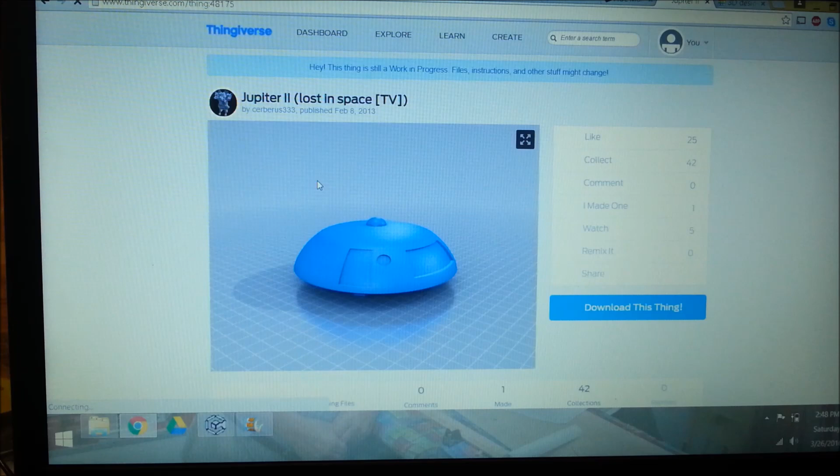And it appears he has this in two files. One is the whole spaceship and one with it split, so you can glue it together and you can have details on top and bottom. So I downloaded this object and I'm going to import it into Tinkercad.

And let's see, it's in my, here we go. It's in a directory and a subdirectory. And Jupiter 2 split. So there's the file. I'm going to select that, hit open. Now it doesn't just come onto your work surface. You have to go over here. I've got it in here. Choose file, Jupiter 2, etc., etc.

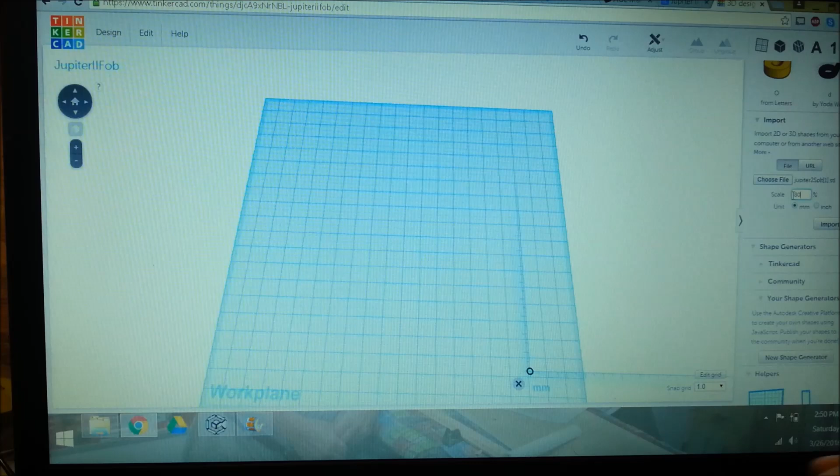Scale 100%. I think we'll make it a little smaller than that. Let's make it about 80% and import it. Little bar's working. Boom, there it is. I just happen to have a little bit of silver filament left.

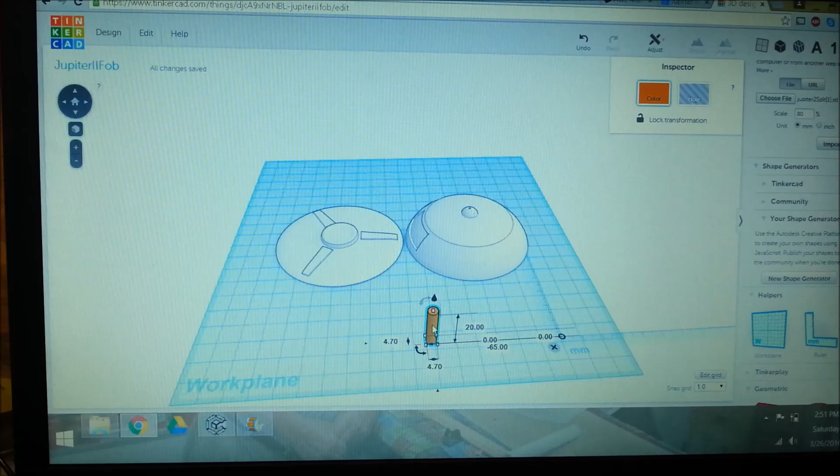Now to make this into a pull, I have to have a cylinder, and I've measured the diameter of the ball chain and the little coupler piece on the bottom. And the ball chain itself is an 1/8 inch. It's actually a little bit under, which is 3.17 millimeter. The coupler is about 4 millimeters. So I need a clearance hole.

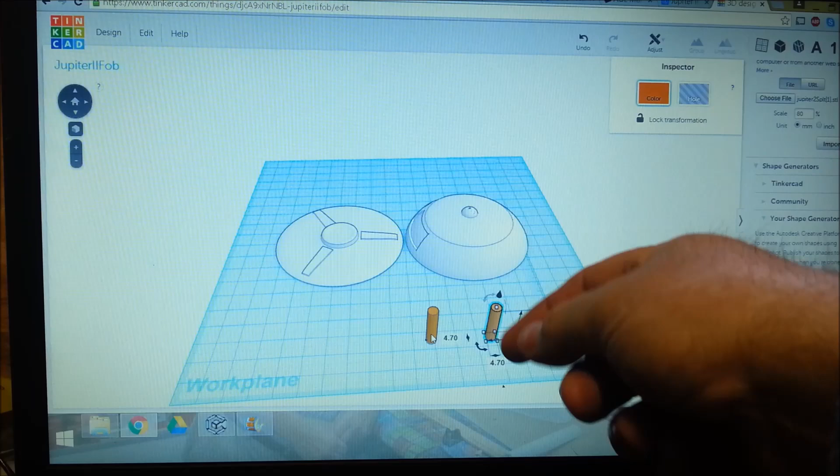I want to have the chain coming down through the center here and the coupler hidden up inside of this. So I need to clearance the coupler so it can slide up inside, but have this hole here in the top be only 1/8 of an inch, so it will stop the coupler, so the coupler won't get through. So I'm going to print this at 3.2 millimeter, which is about 1/8 of an inch.

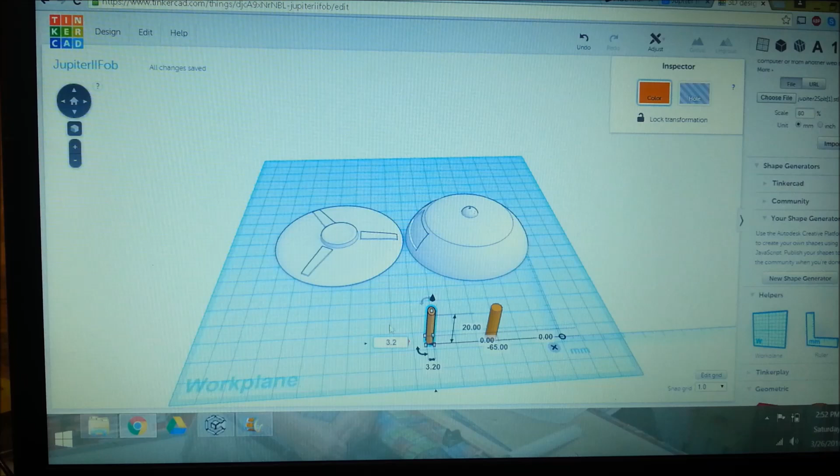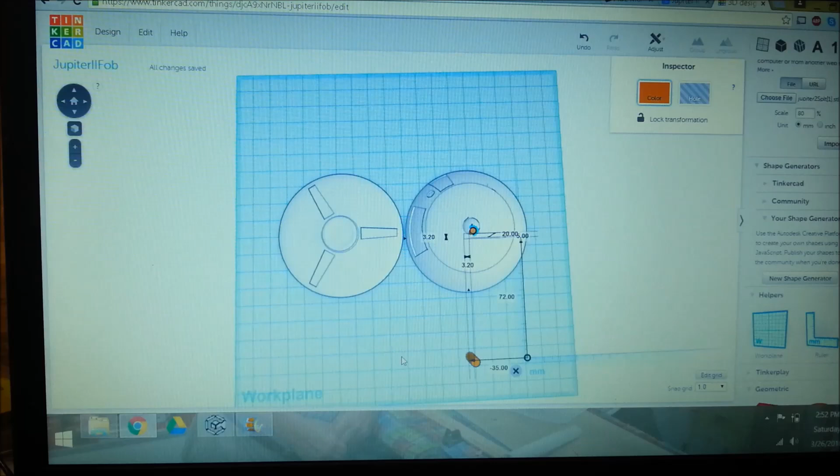And this needs to be my top hole. I'm going to drag it over here, and it doesn't quite come through there. Let me raise it up 5 millimeter. There we go. Now I need to center that. Now this is all one object that I can't ungroup. So if I were to use my centering tool, it would probably put it right here.

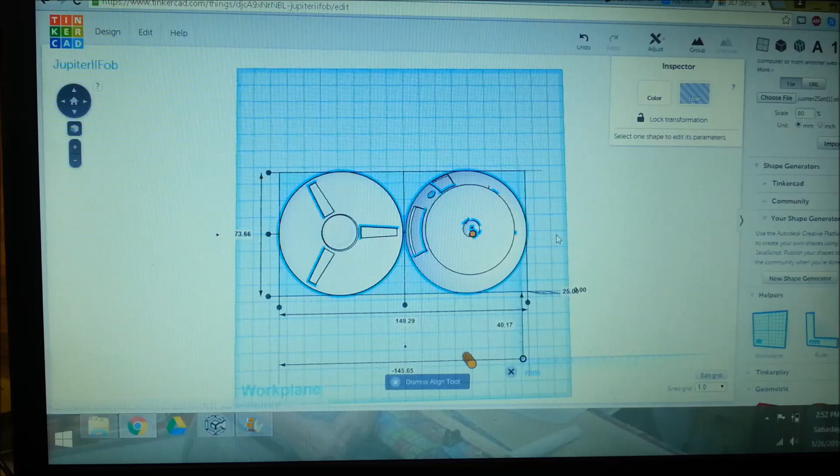But I can use the centering tool to get it in the center from top to bottom, and that'll help me do alignment. So let me grab this whole thing here and adjust, align, center. It should be in the middle. And it actually looks like it's in the middle left to right too. It's pretty close.

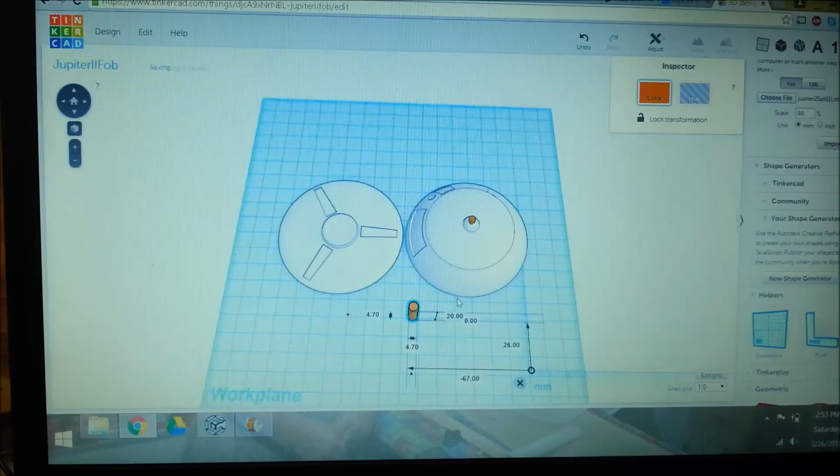Okay, this piece here needs to go underneath of it. And I think I'm going to shorten the height of it to, let's say, about 12 millimeters. That ought to be enough. Let's make it 13. That's about 1/2 inch. That'll be enough to hide the ball chain coupler up inside of it.

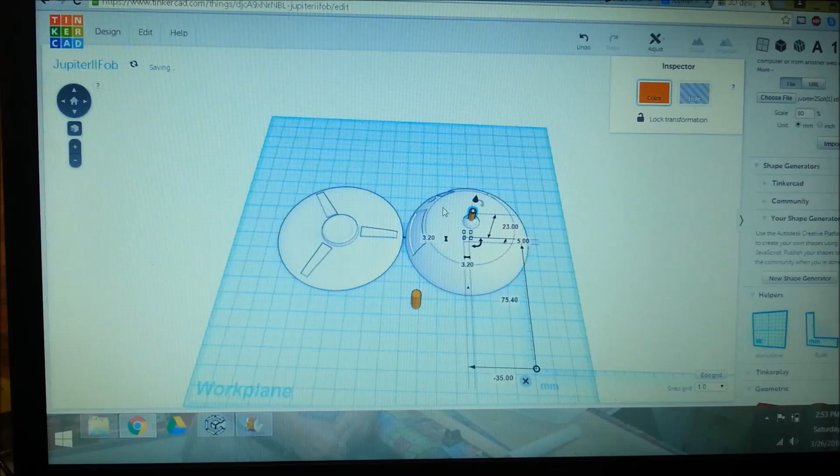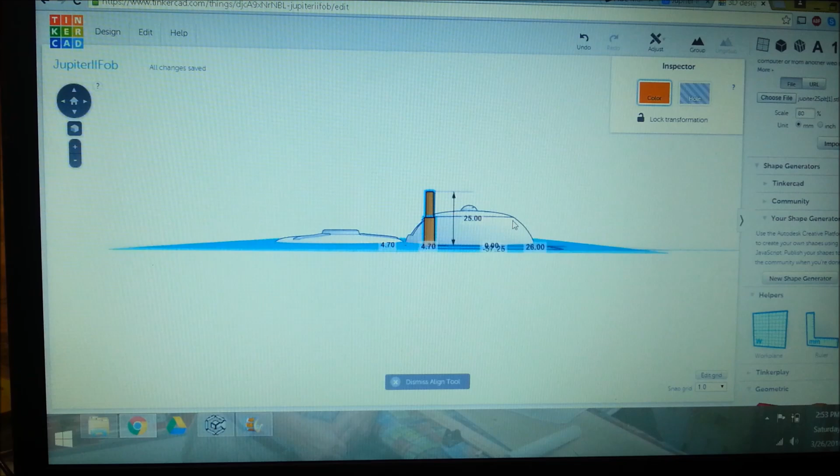And really, I did this wrong. I really want to center. Woo, what am I doing? Must have grabbed that little white block for stretching that. Really what I want to do is center these two objects and group them. Adjust, align, center. Okay, so there's what my hole is going to look like. Let me group it. Let me make it a hole.

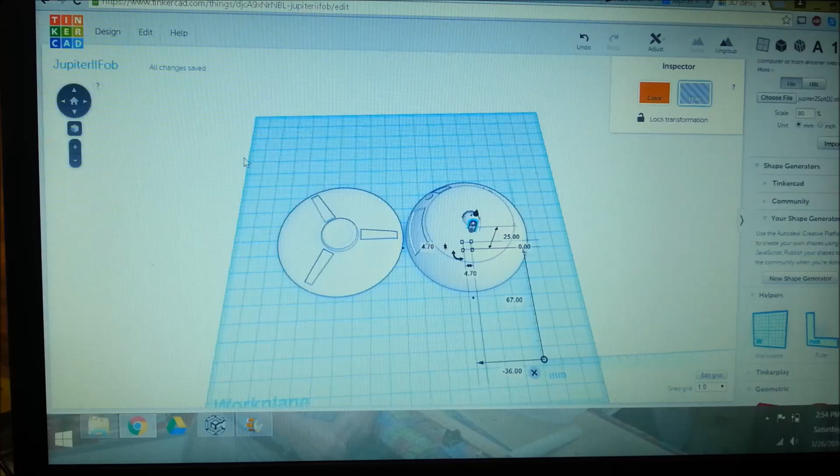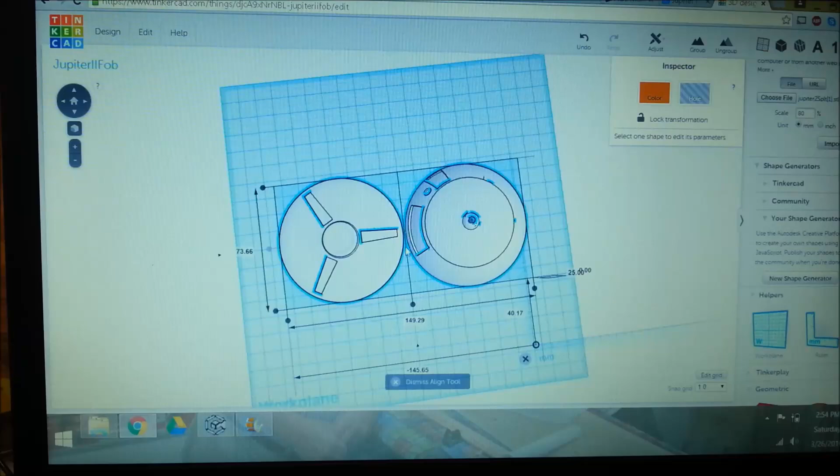And just to give you an idea of where the big hole ends, I'm just kind of sliding it in there. Okay, so now let me center it on the horizontal axis. Adjust, align, and I'm going to hit this. And I'm going to look at it this way. So I'm centered perfectly that way. But the question is, am I centered this way?

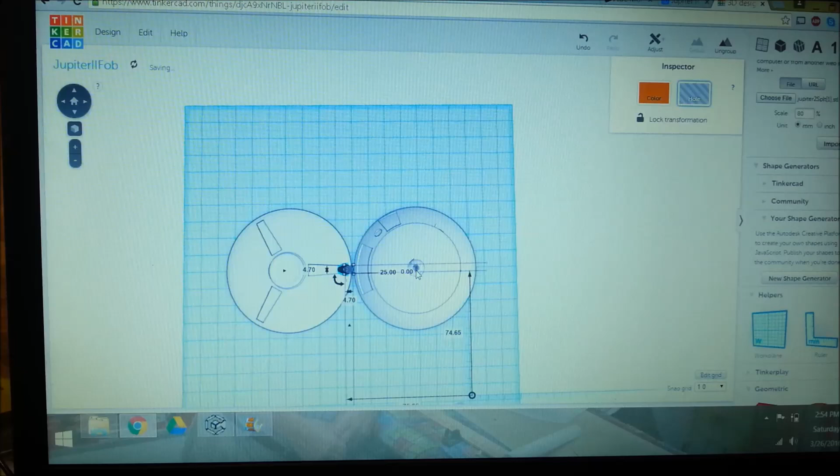Now, in order to get rid of any weird angles here, I'm going to move this into the center of the screen. Wow, it really looks like I've got that dead in the center there just by luck. I've done that twice in a row. So let's copy this. And now I'm going to use my left arrow and move it over and put it in the center of the base.

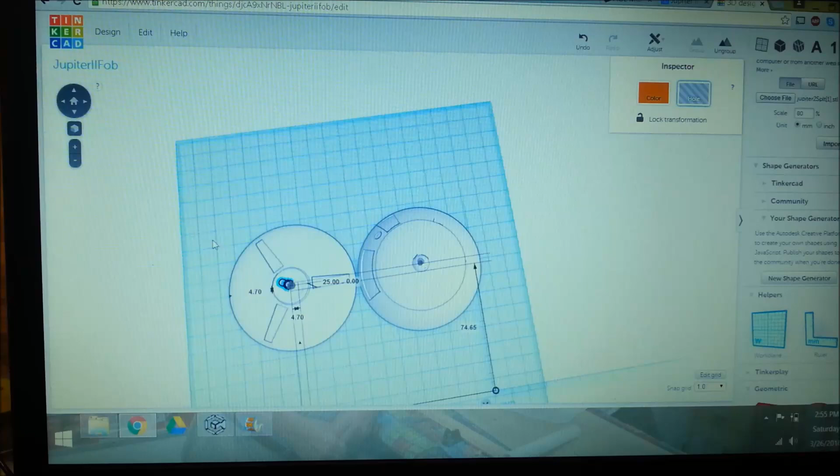And the big diameter is emerging up through here, just like we wanted. And I know it's centered this way because I just copied it and it sets it on the side and I slewed it across. So now we got to see if it's centered. We got to get it centered in this dimension now.

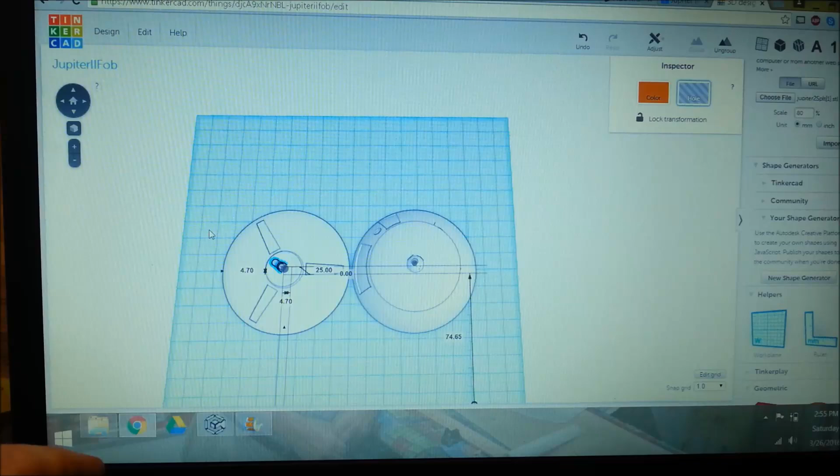Now notice I'm looking kind of down the side of this. It's got kind of a fisheye effect and my eyeball's right here. And so I'm seeing the side of that object, that whole object that I created. So I need to slew this whole thing over. So I'm going to hold the shift key down, right mouse button, and slide this over. And now you can see I can get directly above it.

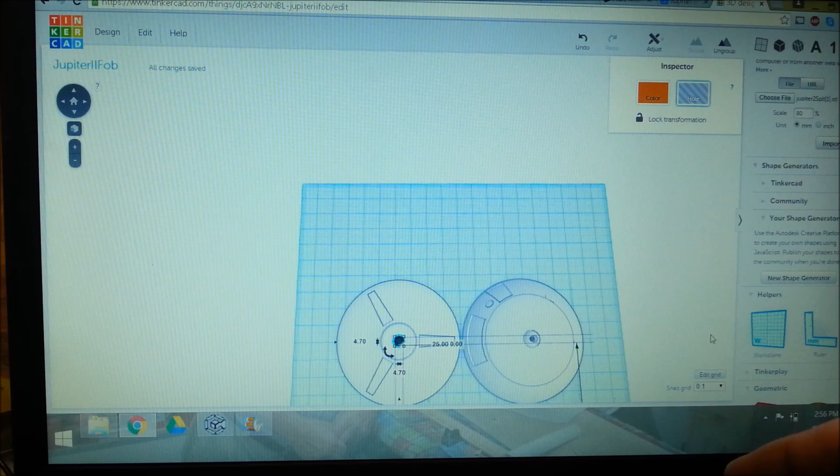And it looks like I need to go to the left a little bit more. Let's try 1/10 millimeter. Yeah, that felt like too much. Let's come back a little bit. Now that feels like about the center. Now if I'm a little bit misaligned between these two holes, it won't matter because I can run a drill bit up in here after I glue it together.

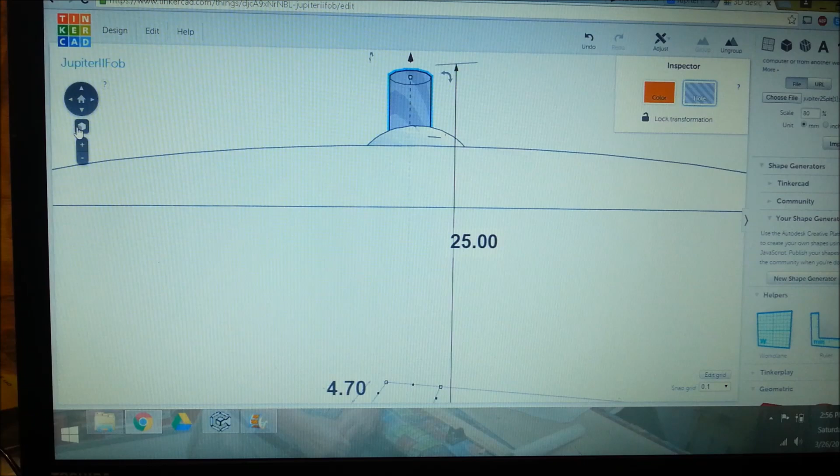Wow, now that I'm looking at this, it doesn't really look like it's in the center of the dome, does it? I'm going to select that item. We're going to zoom way in on it. Oh, look at that. Okay, so let's actually get it centered. And I'm looking at the distortion of the shadow it's showing me to kind of center that. Let me slide it around this way. That looks so much better.

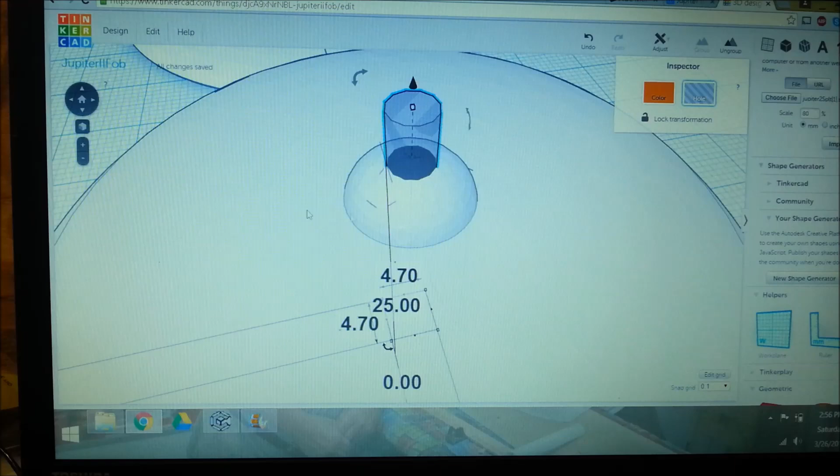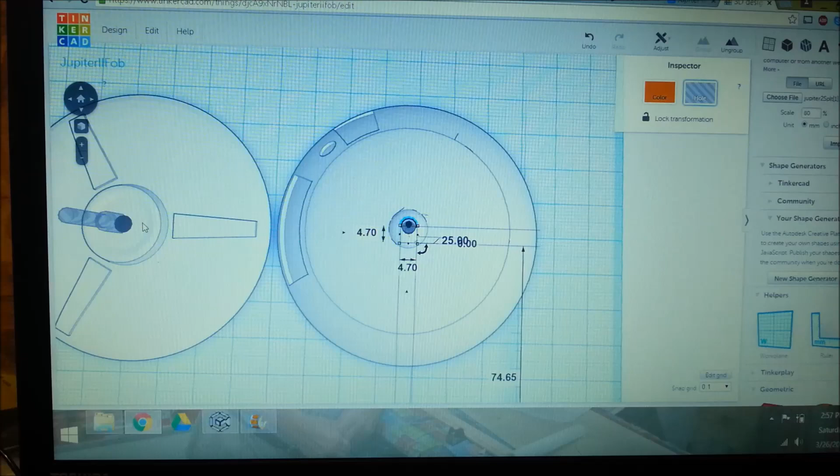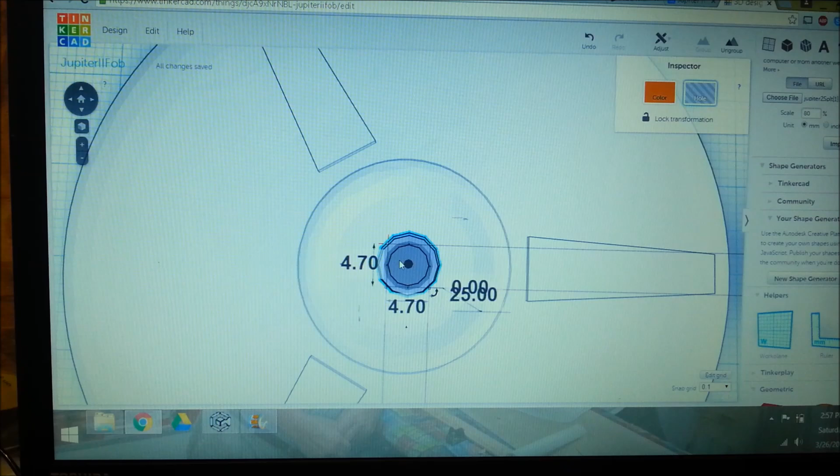This is the view that really counts. Yeah, I think I got it as close to the center in this direction as I can. I use the program to center it this way, so I don't want to mess with that. And let me pull this in and look at it again. Wow, I think I got that in the middle. Maybe it's a little closer that way. Let's select it. Yeah, I'd say it looks pretty good. I'm going to be happy with that.

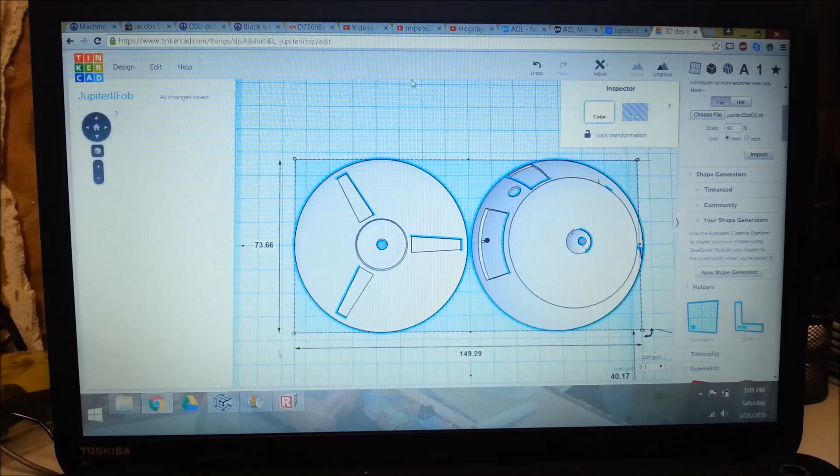Alright, before I import this into Repetier to print, I need to group this so that these objects will actually have a hole. There we go. Now I can download them for 3D printing.

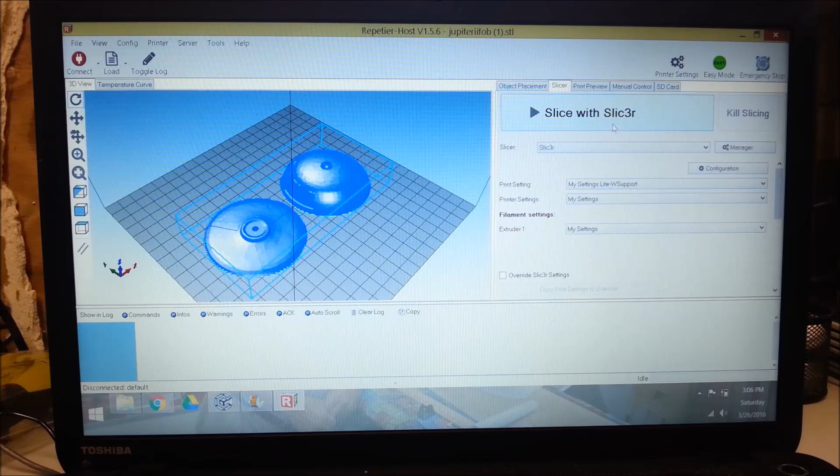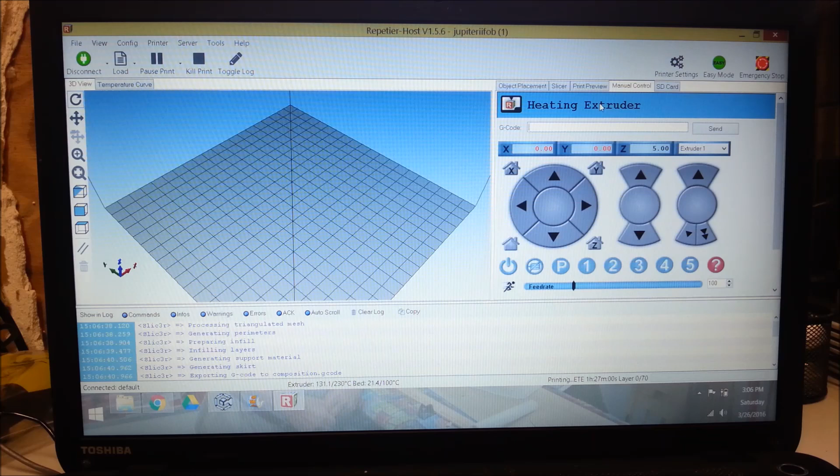I've got my light settings here where I'm not printing a solid object. It's just 2 shells and 25% fill. It says 11.3 meters of filament. I don't know if I have that much. Let's give it a go. Heating extruder. I will show you the results.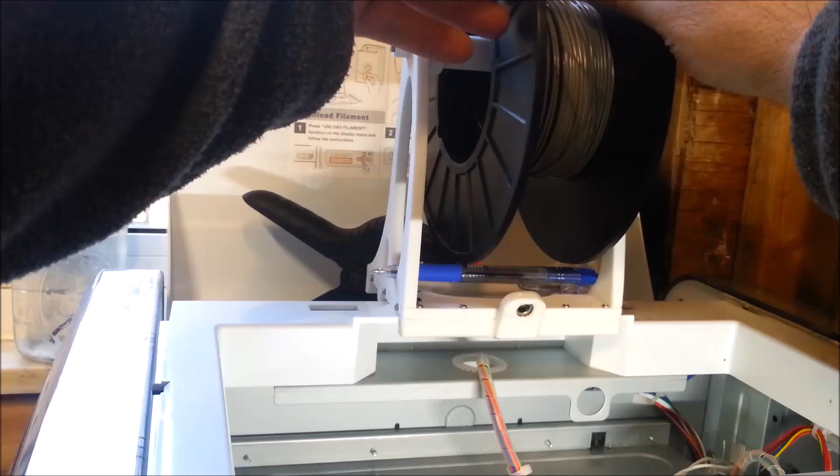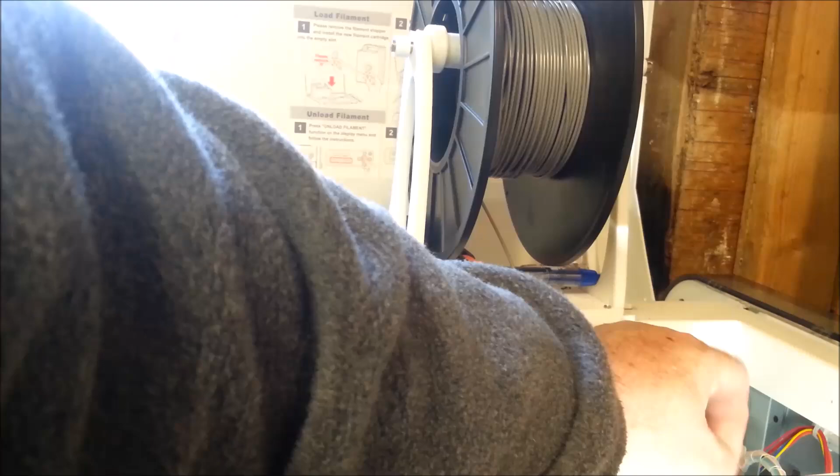Here's my prototype filament roller. I haven't done a video on this yet. Have some more modifications for it. We'll talk about it later. I guess this is gray, not silver properly.

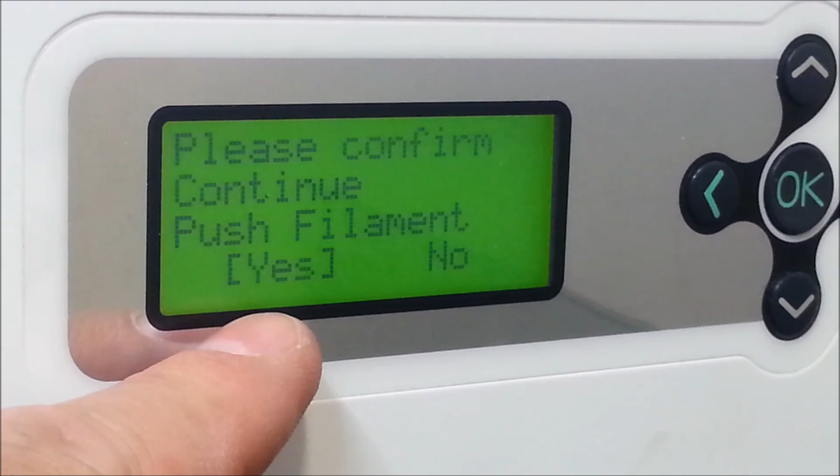There we go. This is the menu for loading and unloading filament, and I find I have to do 2 pushes, 2 segments of filament to push in to get a clean color change. So let it run through another, I don't know, a couple inches of plastic.

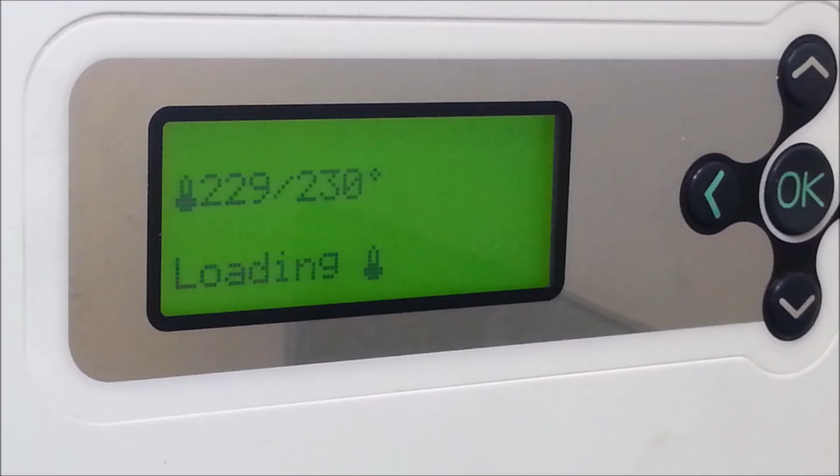Emergency. Got some junk hanging on there. Can't have that. I see one more little bit of debris that can fall into my print and mess it up. I think I got it.

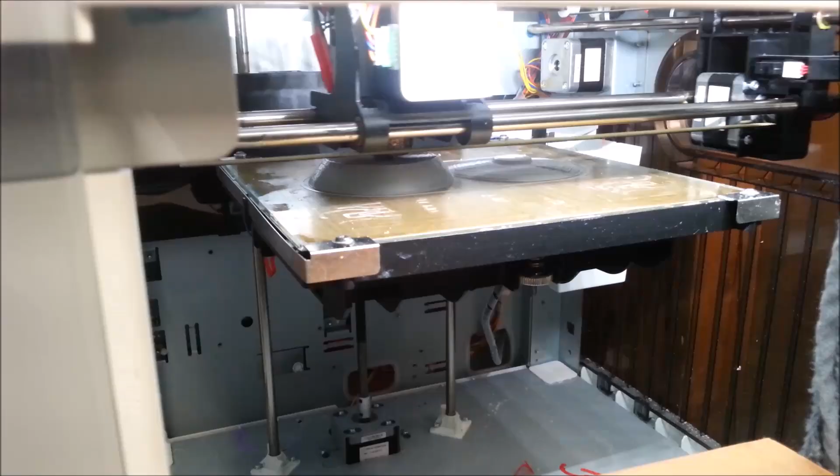Check it out. There's 20 minutes of printing left. We are running out of plastic. We are running out of plastic. Since I've got the door open for filming, I've got the openings covered up to try to keep it warm in there. 3D printing works, especially with ABS, you want to keep the build area nice and warm. Now back to our regularly scheduled program.

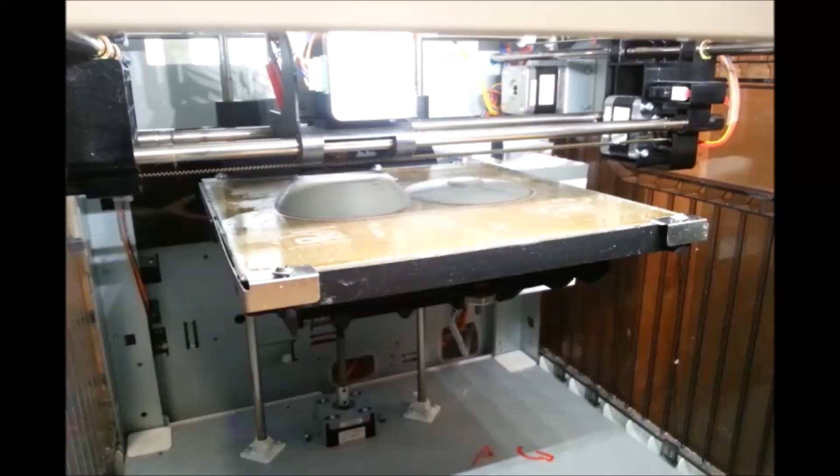Alright, we have about a dozen wraps left on the spool. There's about 20 segments in the side here, and I've counted that it's turning about 18 segments every minute. We've got 10.5 minutes left. So maybe the family Robinson will find their way home after all.

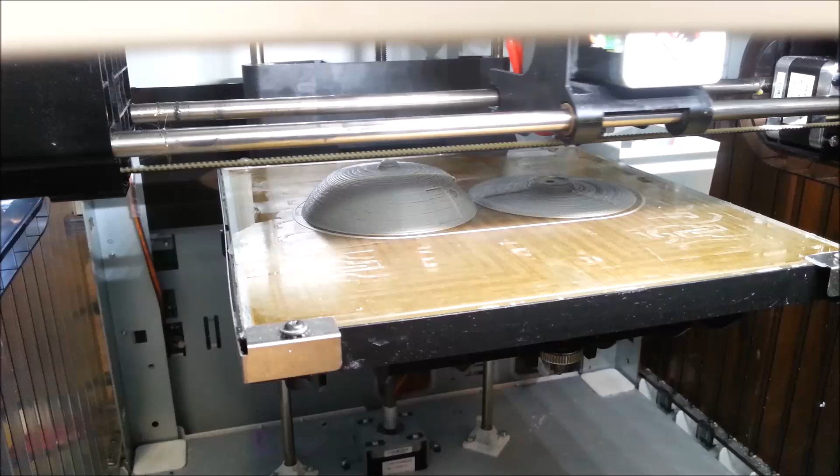Well, folks, we've got 6 or 7 wraps left on the spool, and it looks like we are working on the, what is it, the radar tower up there? Observation tower? I don't know. It is almost done. Awesome. Now we got to wait for it to cool.

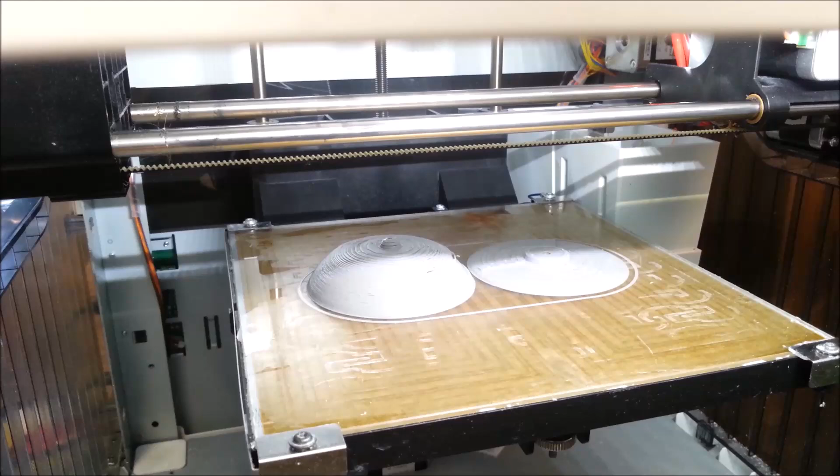As it in its orbit comes around into the sunshine. Probably could have printed it at a lower resolution or higher resolution. We'll smooth it and see what it looks like after that.

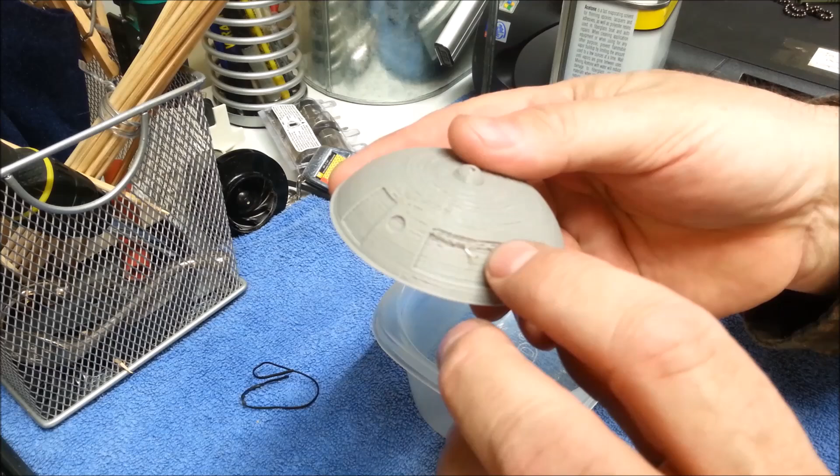So here we are. We have our Jupiter 2. I was right, we have a little bit of a layer here that didn't take too well on the windowsill, but there's a layer above it that's good, so I can carve that away. What I'm going to do first is glue this together by solving it with acetone.

And I'm just going to get some out of here with a little rolled up piece of paper towel. Put some on that side, put some on this side. Let that plastic soften a little bit. Now I'm going to see if I can get a couple of drops. And let's put it together.

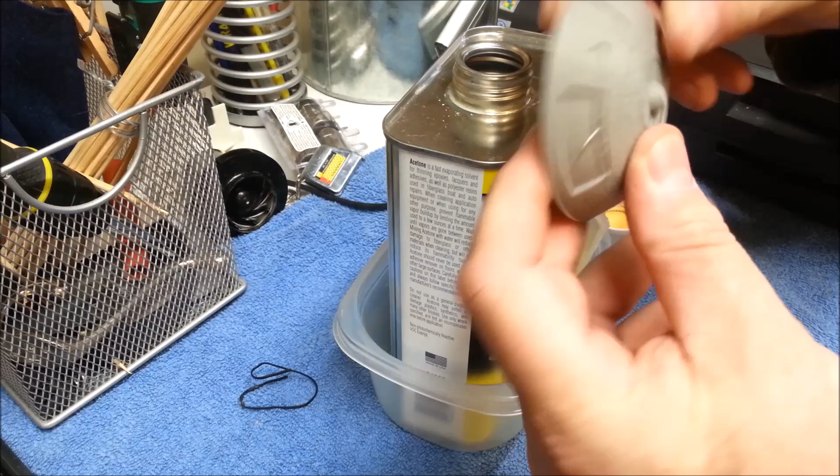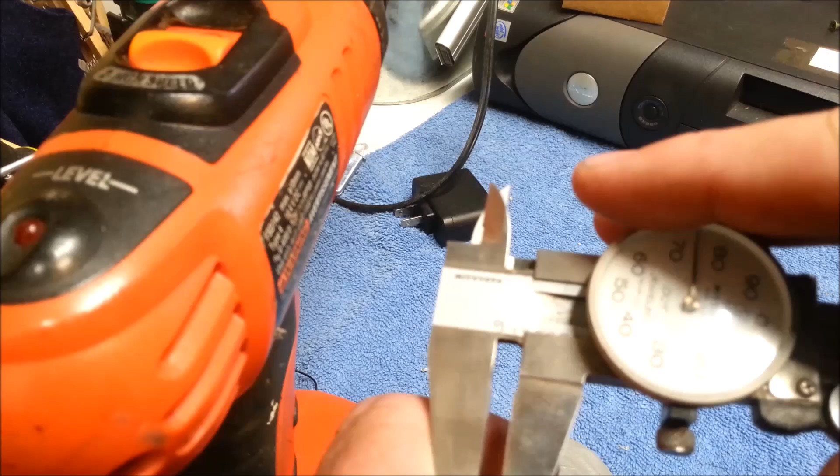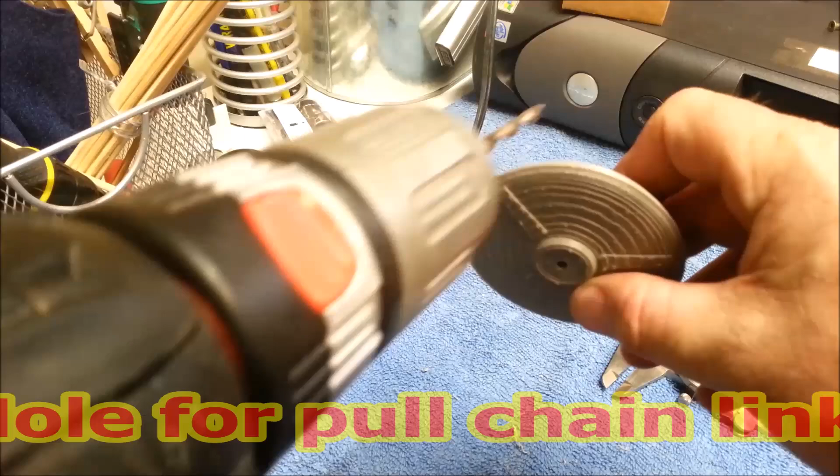Just like that. I think I could possibly print a better one. But for now, I'm going to work on this one. Drill my holes open. Now here's a lesson on measuring drill bits, and I realize I'll shade this scale so you can see it. You put the bit in and turn it to open up the hole. Careful not to go all the way through. There it is.

So there we have it. The Jupiter 2 as a light fob. Awesome. Now, I'm going to clean up this little flaw here, and then we're going to acetone smooth it. I gotta say, this is the first thing I've printed off of Thingiverse that pleases me. It would probably look better printed in PLA. So now let's see if we can get some acetone in our jar and smooth it.

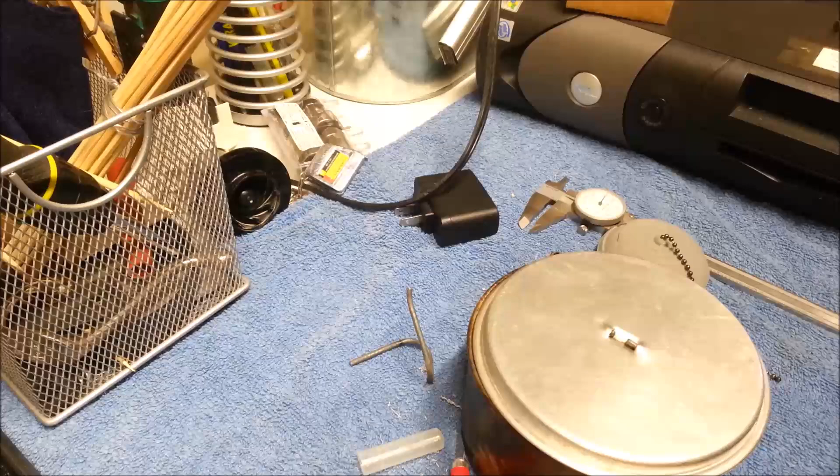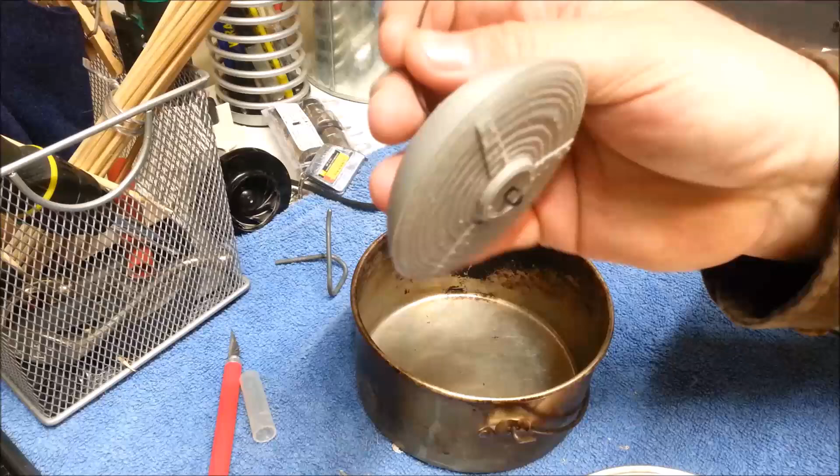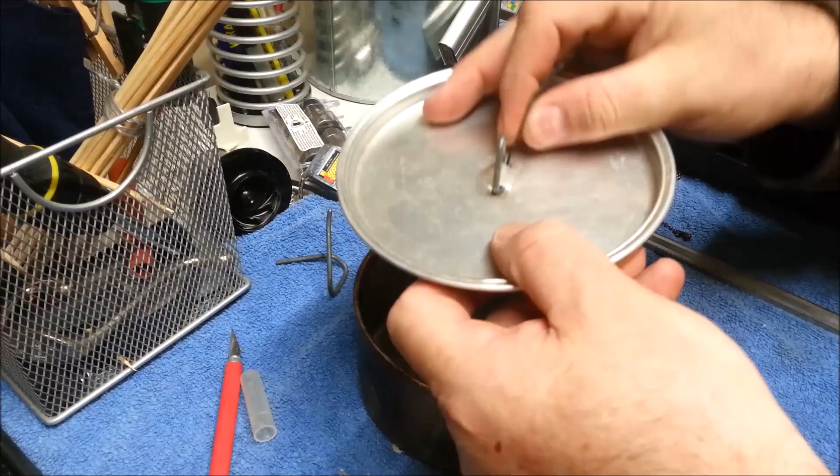Look, we have a problem, NASA. We have a solution. My Boy Scout cook kit. I can't see inside of it, so I won't know if it's melting. A little loop where I fed it back in the hole. And then I think I can come up through this hermetically sealed handle hole somehow or another. There we go. I think we're good. Into the acid you go!

Uh-oh. Do you know what I'm thinking? I'm thinking that I can use this bed in the 3D printer to heat this acetone and make this happen faster. Remember the last time I smoothed something, it took hours. So the idea of heating this came from Evil Twin X. He thought I should use a coffee cup heater. I'm going to set this at 61C. And we'll let it go. If I pass out, somebody call the ambulance.

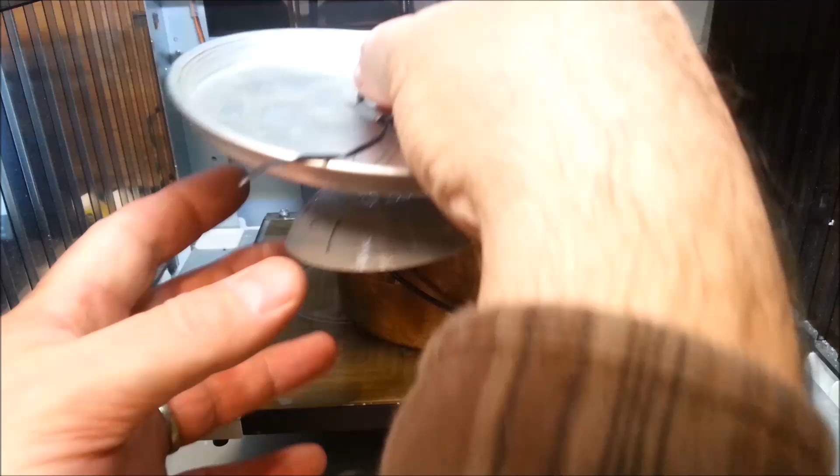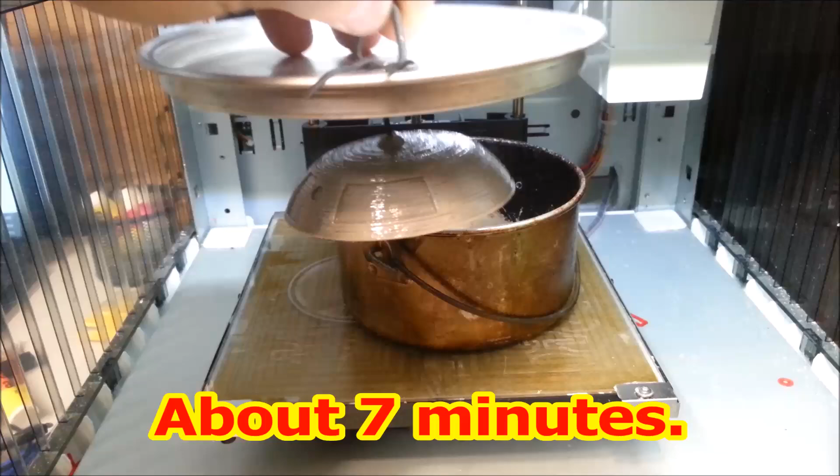Alright, let's check it. It's been a few minutes. It's got a glossy appearance. I think this is working. Feels slightly sticky. Alright, let's check it out again. Whoa, it is wet looking. I think I better stop there. Jupiter 2 will sit here and cure, and it should be very smooth when we come back.

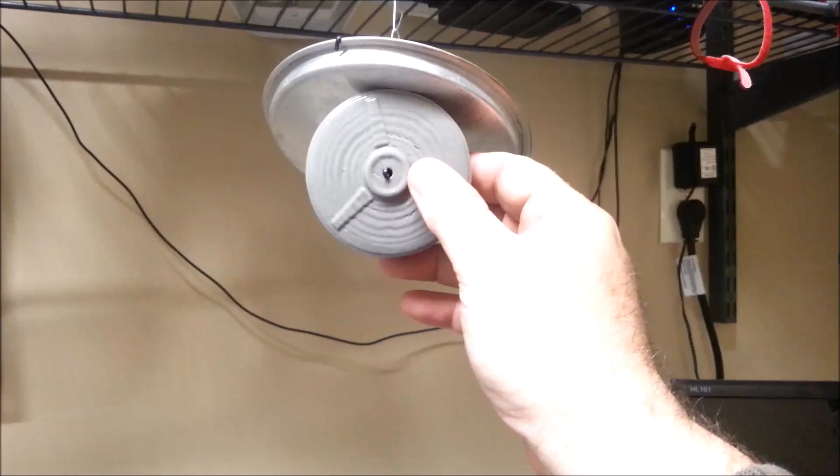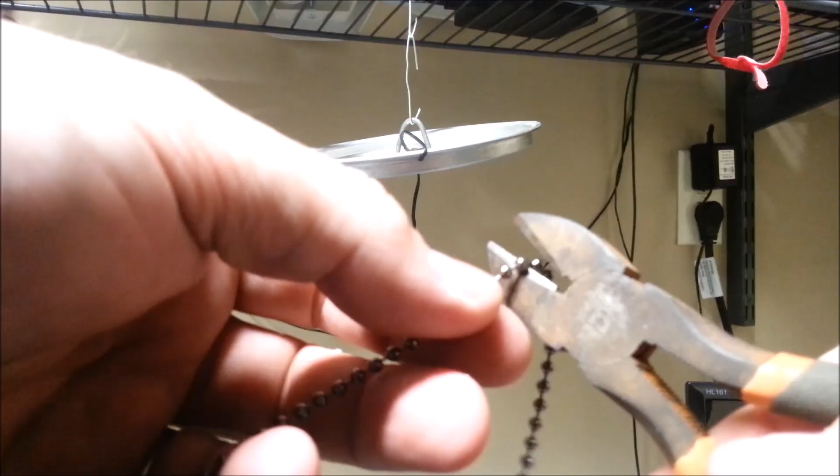Danger, Will Robinson. So here we are. It's not sticky anymore, but it sure is a lot shinier looking and a lot smoother looking. I think it takes a rather coarse print and makes it look a lot better. Let's see what it looks like in place. I think we'll shorten this a little bit.

So there we are. We can take any object we find that's available in an STL file and produce a cool fan or pull chain light fob out of it.